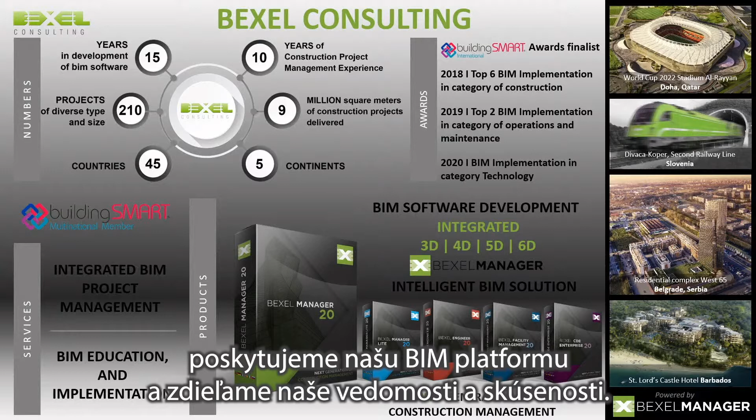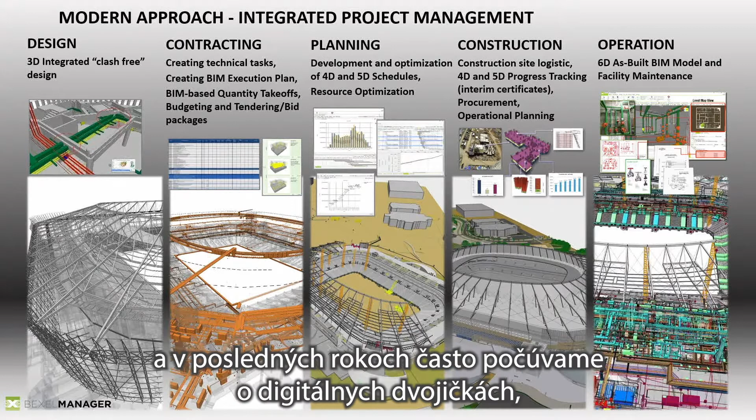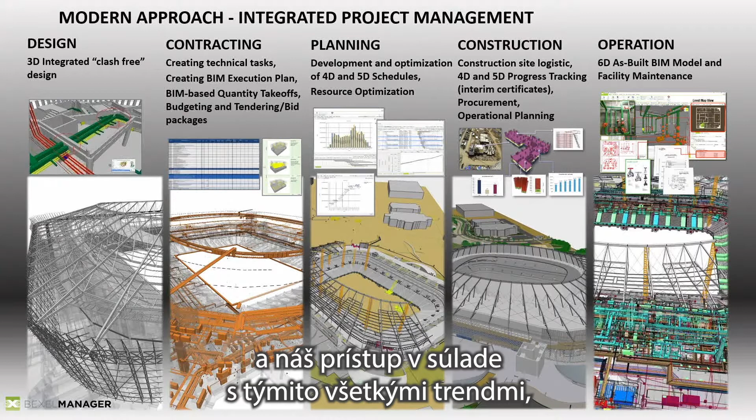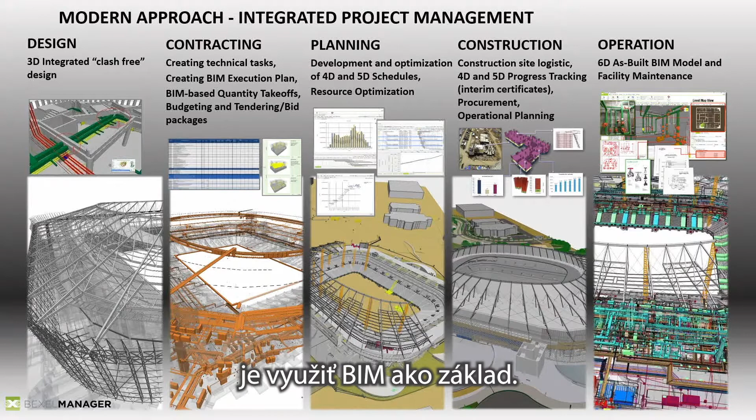We strongly believe that digitalization and integrated approach in construction is an ongoing process. In recent years, you often hear about digital twins, single source of truth, Internet of Things, and similar. Our approach is in line with all these trends, and BIM processes and standardization of construction are the foundation for success. The best way to optimize your construction processes is to use BIM as a base. Once you establish all these team members and processes, you'll be able to benefit in each step of that journey.

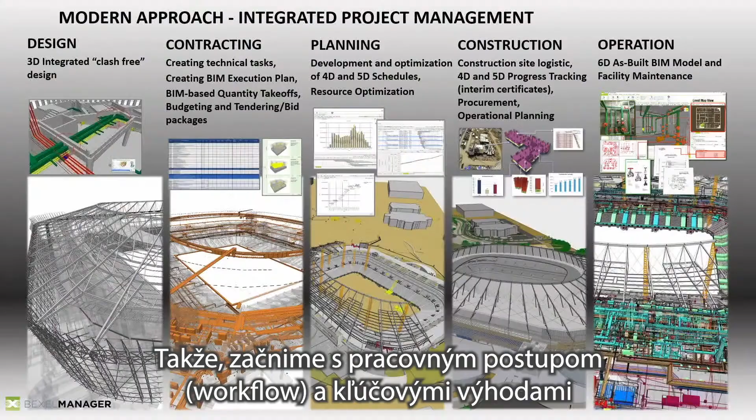So let's start with the workflow and key benefits of an integrated BIM approach using BEXEL Manager. One of the crucial things is the possibility to flawlessly and frequently manage and exchange your information. BIM is building information modeling, as you know, and that's why the use of a proper common data environment is very important. You need to be sure that all the data, geometry, information, and all the documents that you attach to the project are safe and that you can easily find the latest information.

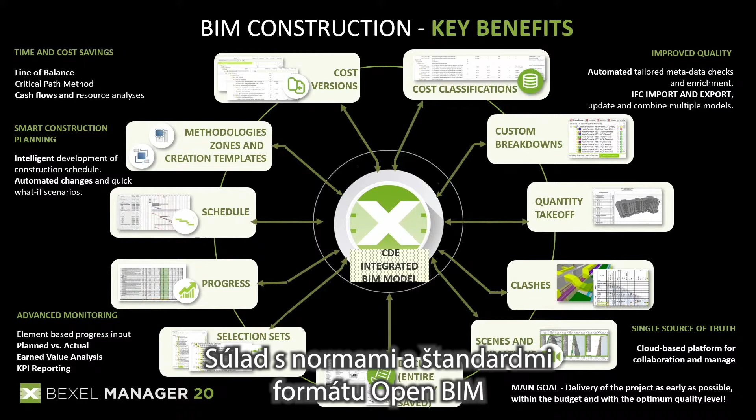You also have to have the ability to explore the entire history and all previous versions as well. Using BEXEL Manager, the common data environment allows all these things. What is also very important is compliance to open BIM standards and formats, so all the data can be imported using IFC files, which are the industry standard for information exchange.

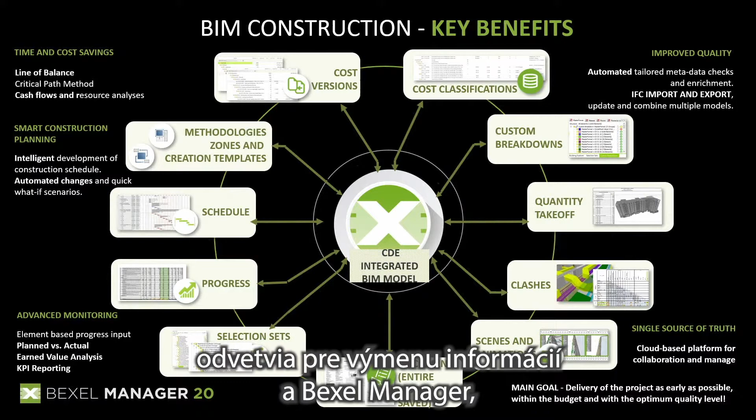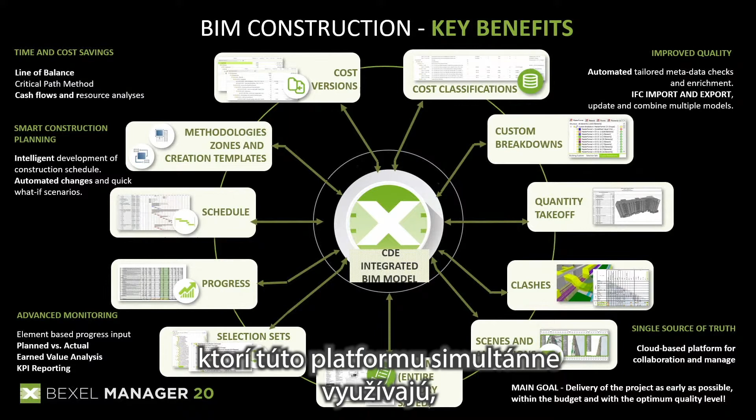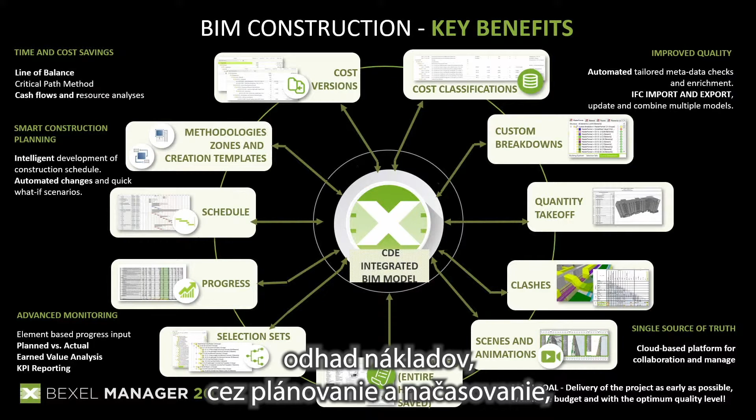BEXEL Manager as an integrated BIM management platform allows you to collect, manage, and inspect all BIM data in your project. And not just that - within the company and within the platform, we have a lot of specialists and experts who simultaneously use the platform for various analyses, from quantification, collaboration, cost estimation, through planning and scheduling, all up to tracking the progress and facility management once the project is completed.

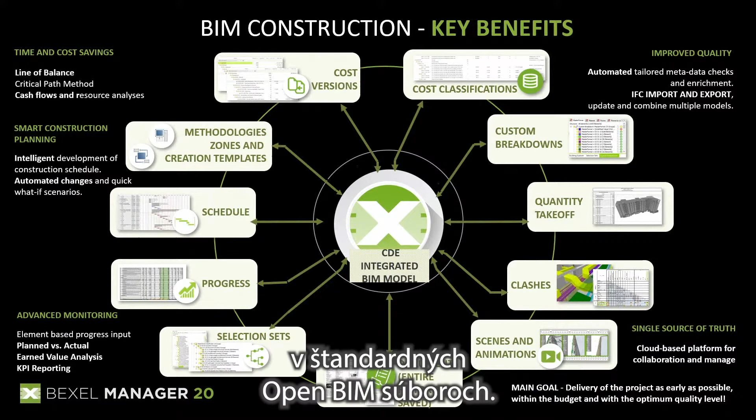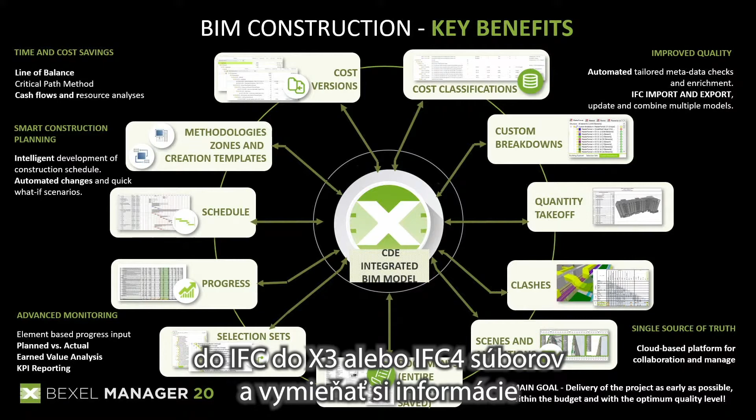So the data can also be loaded in one place and then can be easily exported into open BIM standard files again. Or to be more specific, you can export all your federated BIM projects into IFC 2x3 or IFC 4 files and exchange data using BCF files or Excel spreadsheets as well.

Nothing is more important than to present you how the platform works itself. You're gonna learn it best that way.

So this is a brief explanation of the workflow, and I will try to explain this on various BIM projects in which our company was involved, where we used BEXEL Manager to manage construction processes and use it in different levels and different stages of the project.

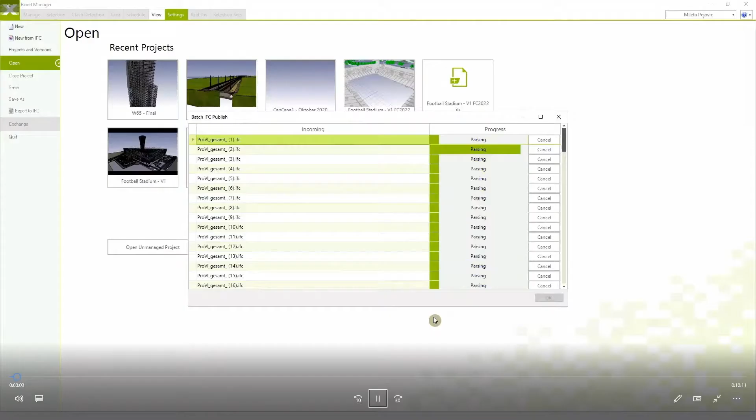As usual, everything starts with a good BIM execution plan and execution strategy. Once you have initial models, you can load various IFC files coming from different sources and authoring tools. The first step is visual data inspection of the project.

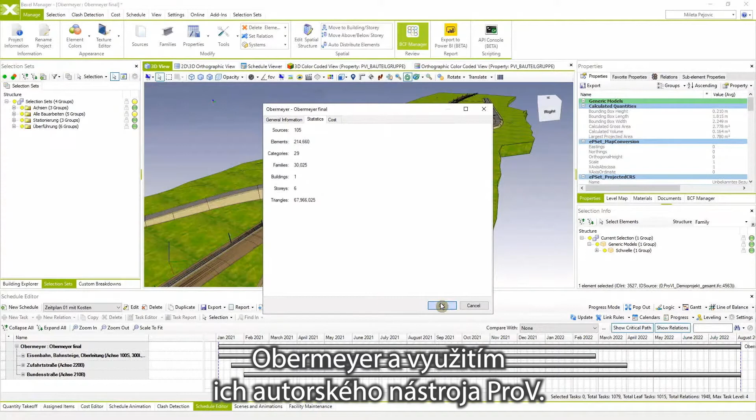In this case, the project you see is a railway project made by German company Obermeyer, using their authoring tool called ProV. The project contains hundreds of IFC files, and the next step is a BIM check, or controlling if all geometry and metadata were done according to specific requirements on the project.

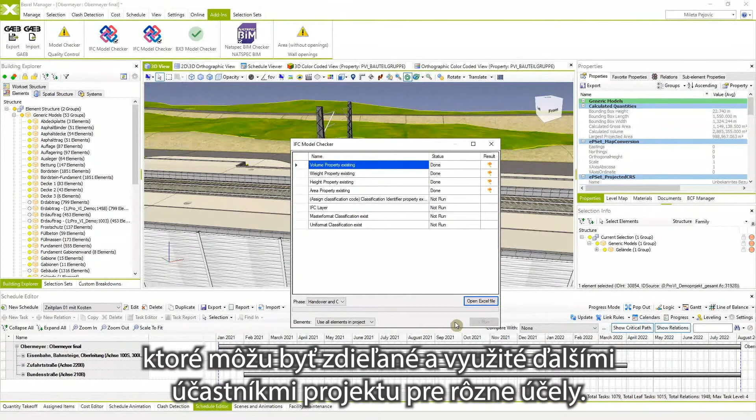That's why we used BIM checkers, or different add-ins which can be usually shared and used by different participants on the project for different causes. This is a really important thing, and that's why we perform different kinds of BIM checks for each different project according to the client's needs.

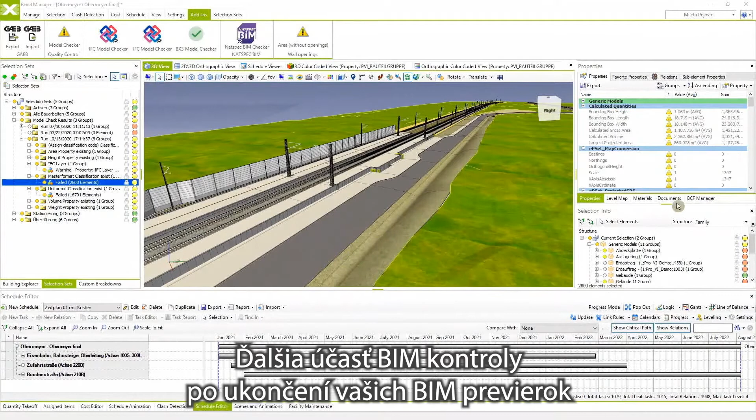Another part of the BIM check, after the completion of your BIM checks, is the ability to export and collaborate on all this data as BCF files. And of course, the next thing is clash detection, or collaboration on the projects.

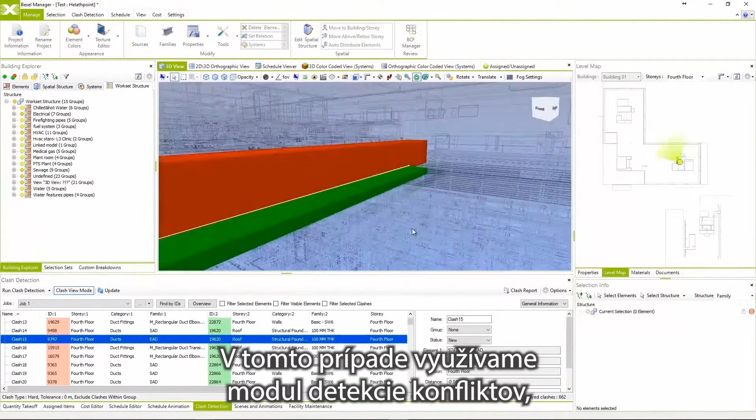We use a clash detection module in this case for a hospital project in the Middle East, and you can use different kinds of clash detection modules, different kinds of clashing jobs, and all these found issues can be easily exchanged with other participants of the project using BCF or BIM Collab, sharing these issues online via a supporting platform.

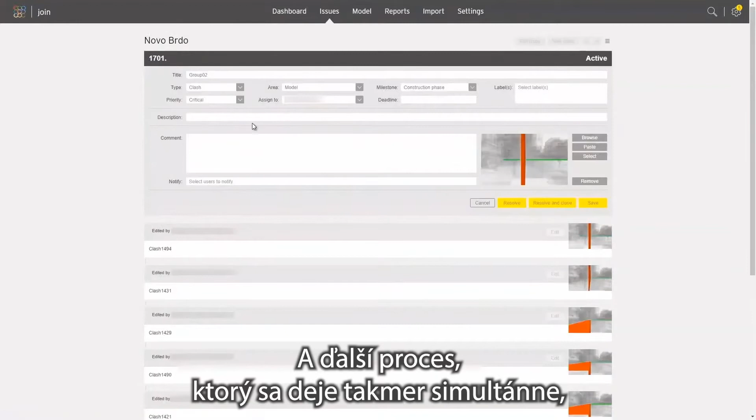And the next process, which is performed almost simultaneously with design collaboration and this clashing, is of course quantity takeoffs and quantification and generating of quantities.

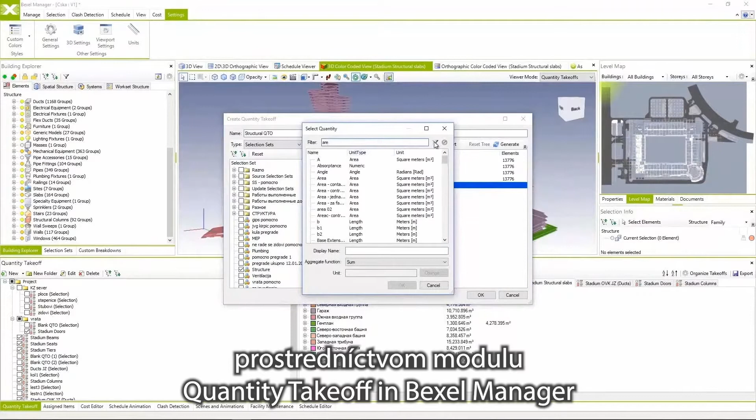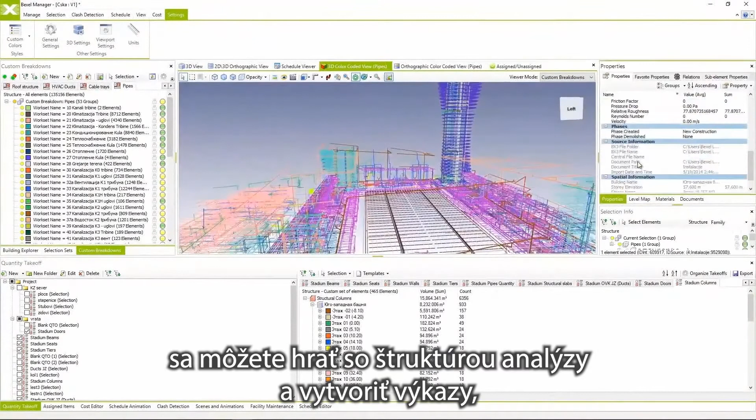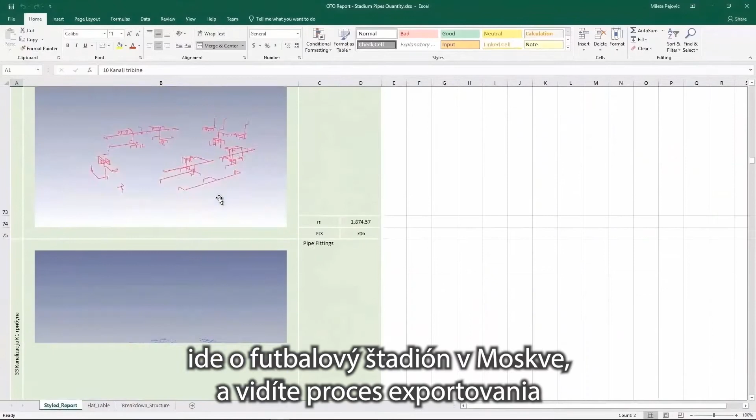So in this case, I'm showing you how this can easily be done using the quantity takeoff module in BEXEL Manager. Even in such a large project as this football stadium, you can see how quantity takeoffs are generated from scratch using various properties from the BIM model itself. Using these properties, you can play with the structure of breakdowns and create the quantities you want to extract, and all the data can be exported into customizable Excel reports. So here you see a quite large project, a football stadium in Moscow, and the process of exporting these quantifications into respective Excel spreadsheets.

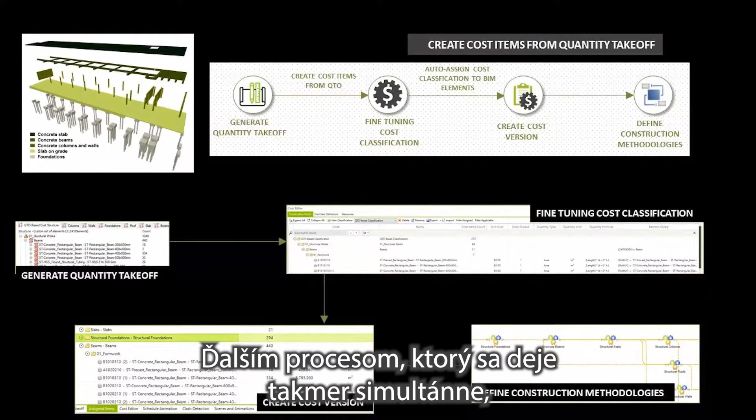The next process, which is almost simultaneously done, is cost estimation. And of course the next thing is cost classification and creating a cost database that can be manually adjusted and used for further steps in the project.

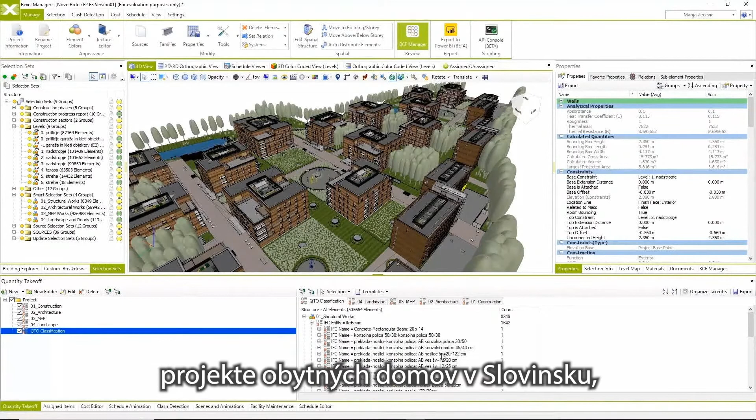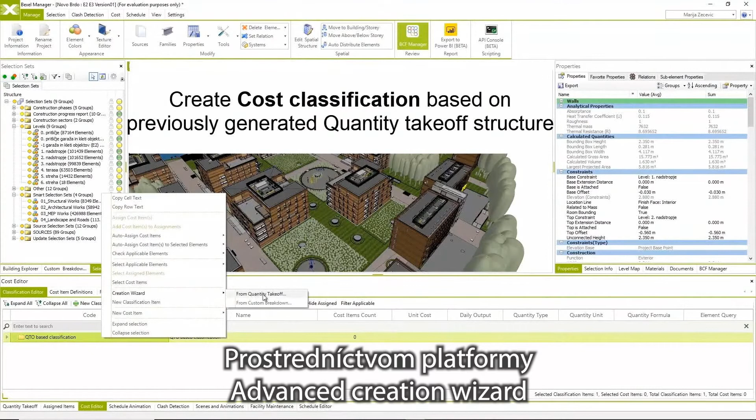So how this works on another large-scale project, in this case a housing project in Slovenia, I can show you the entire BIM-based cost classification created using the previously generated quantity takeoff structure. Using the advanced creation wizard, the platform generates an entire classification with a cost database and cost items, also with smart queries, which can be used to link your BIM model elements with your cost items.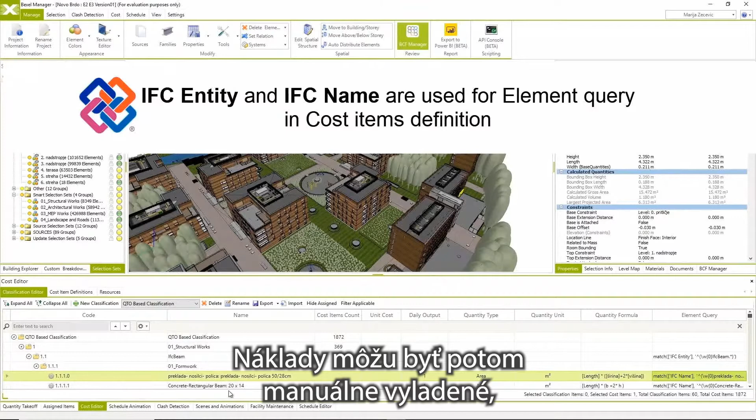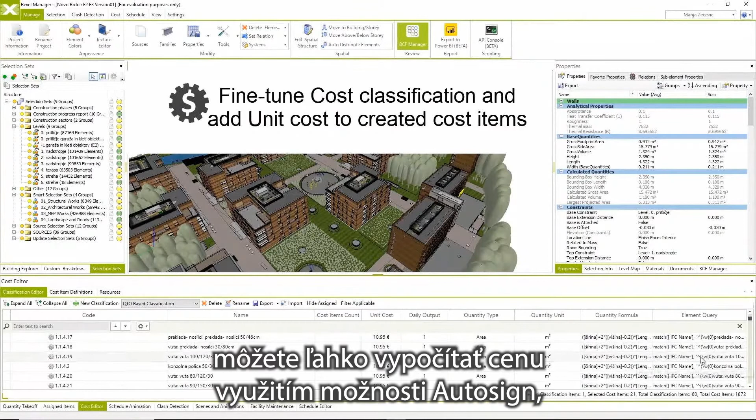Cost can then be fine-tuned manually, specifying custom formulas or calculations in order to have accurate unit prices and resources. Once you're satisfied with this cost database, you can easily calculate the price just by using the Auto-assign option, which connects all your BIM elements with cost items, and using the provided formulas, creates the specified price and value of your project.

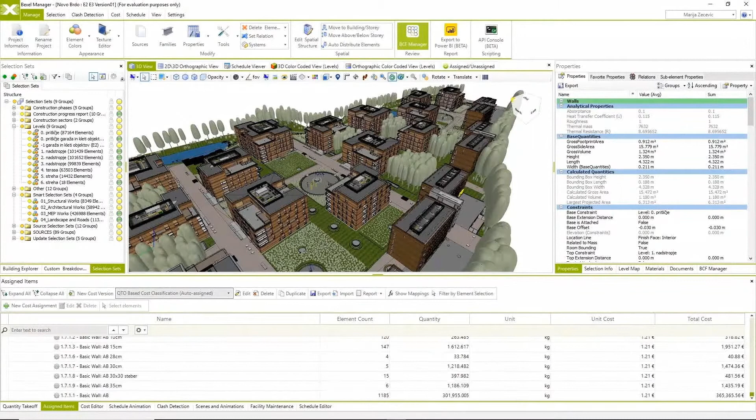This also can be adjusted. All these cost versions can additionally be inspected and managed, and also exported into Excel spreadsheets and compared with different cost versions.

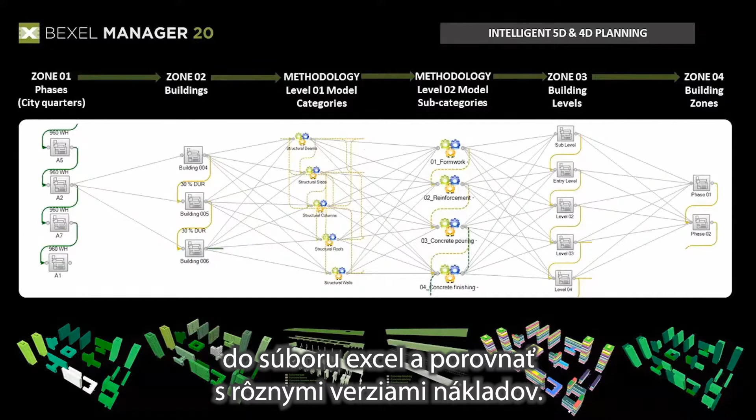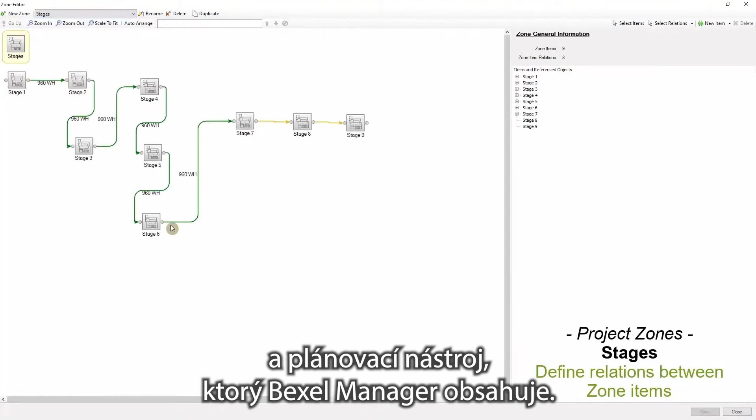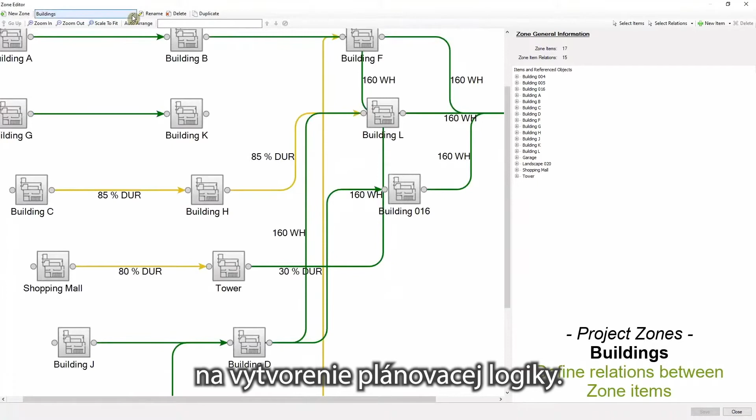The next really important thing is planning. This is how we actually perform planning and scheduling processes using the specific methodology and scheduling engine that BEXEL Manager contains. The engine allows planners to use planning logic and work efficiently using existing cost classification and zoning to create scheduling logic, so the system generates hundreds of thousands of schedules and relations.

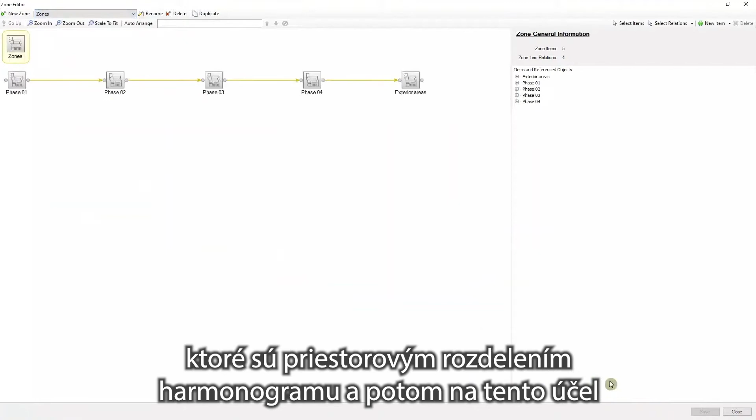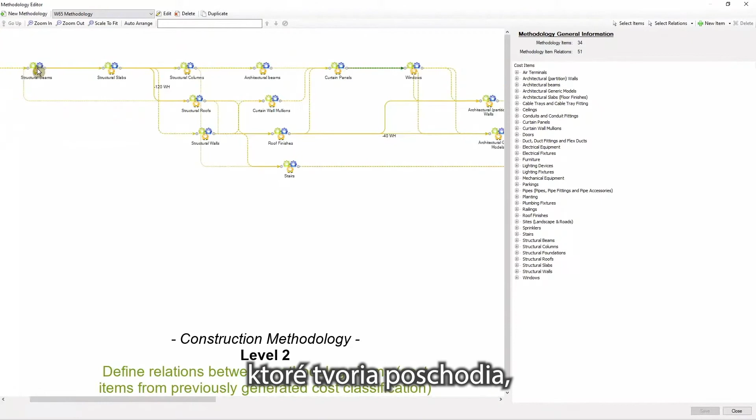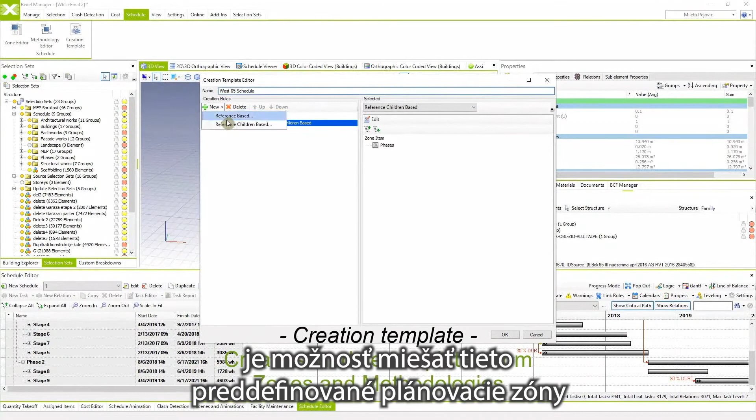First, the planner has to define zones, which are the spatial segregation of your schedule. For this, we can use selection sets and existing system-based segregation like building stories. But what's more important is methodologies. Here you can see methodologies which are used to create different levels, or multi-levels, of the tasks of the future schedule. One of the greatest advantages of BIM scheduling is the ability to mix these predefined zones and methodologies into various variations of your schedule structure or activity relations.

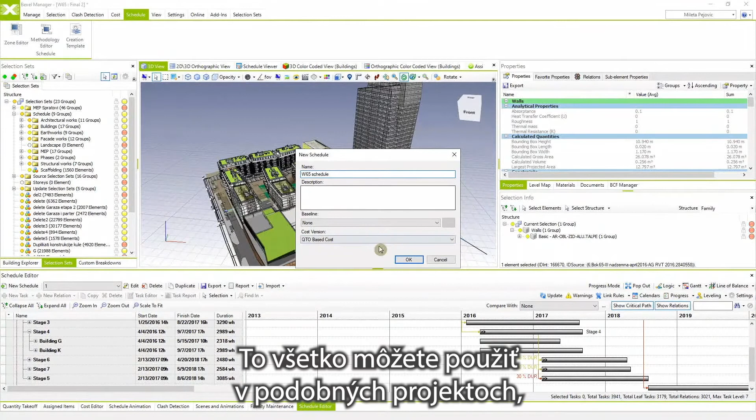These different options can be saved as schedule templates, so all of this can be used in similar projects. You can create one methodology and reuse it for multiple similar projects. Schedule templates allow you to almost instantly generate multiple schedules as a result, without wasting too much time on scheduling itself. So you can see how it works.

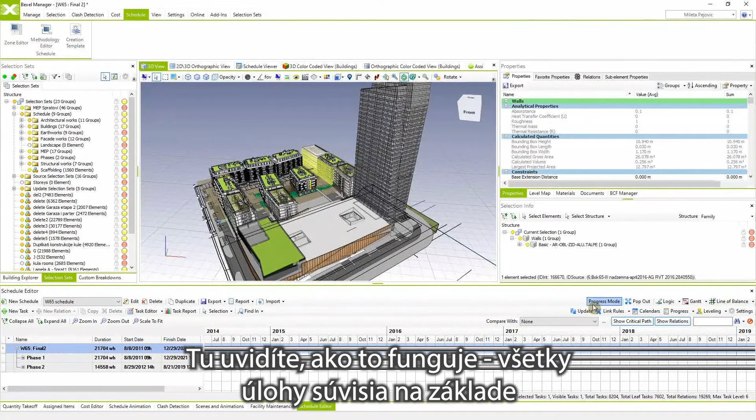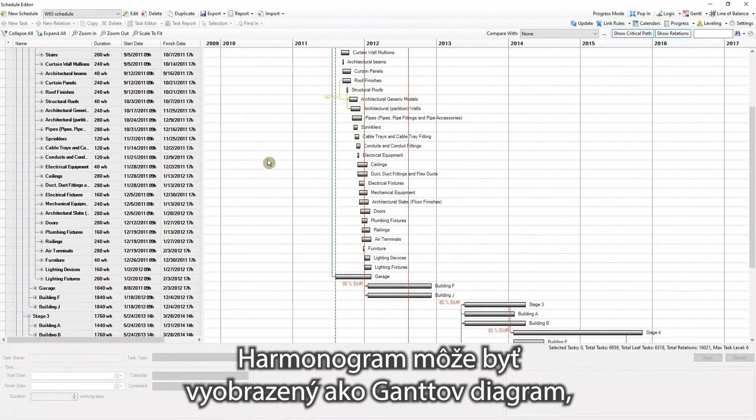All the tasks are related following predefined relations specified in the zones and methodology, and all the tasks are spread down through all schedule levels as specified by the template. The entire schedule can be viewed as a Gantt chart, but more importantly, you can see it in the form of a line of balance, which gives you even more information and insight into spatial segregation of your activities and resources.

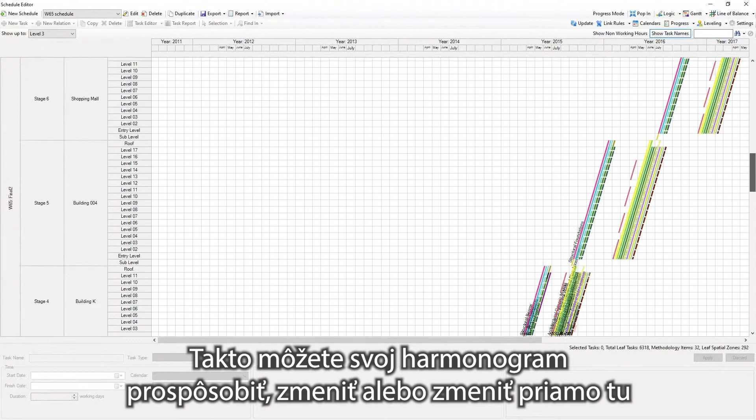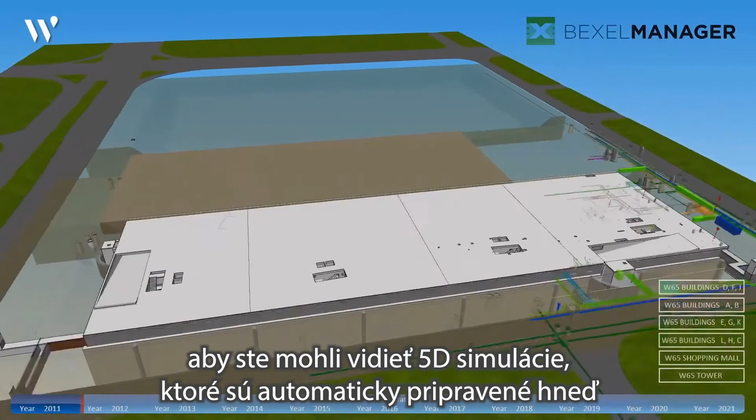So you can customize your schedule, changing it directly here in the line of balance, or, what is even better, your BIM model is automatically related, so you can see your 5D simulations, and they are ready instantly when you generate your schedule.

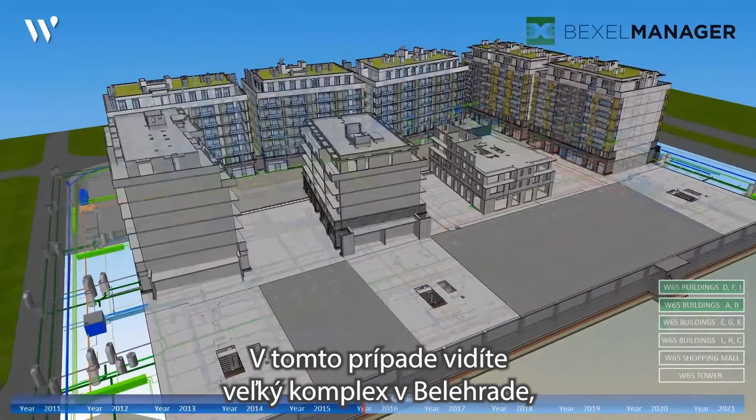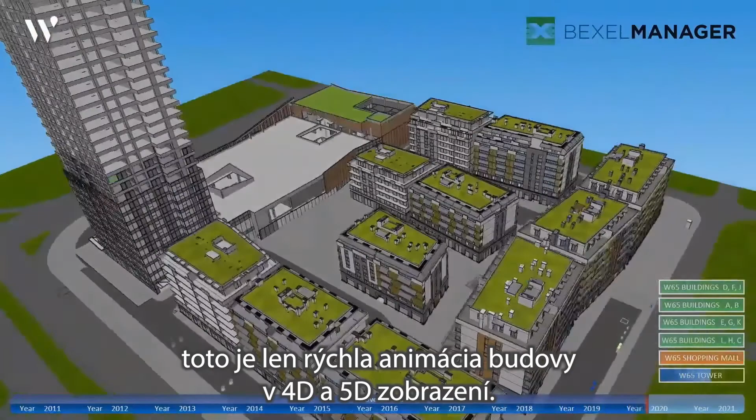So in this case, you see a large complex in Belgrade, which is also scheduled and managed using BEXEL Manager as a platform. This is just a brief animation of a 4D and 5D construction.

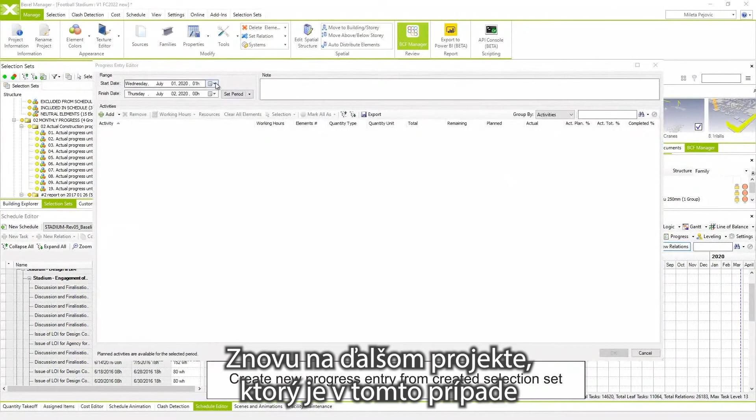So for the end, when the construction starts, you can use the platform to track your progress, and this is really important. So again, on another project, in this case another football stadium, I want to show you how easily you can use selection sets and groups of elements to create your progress entries.

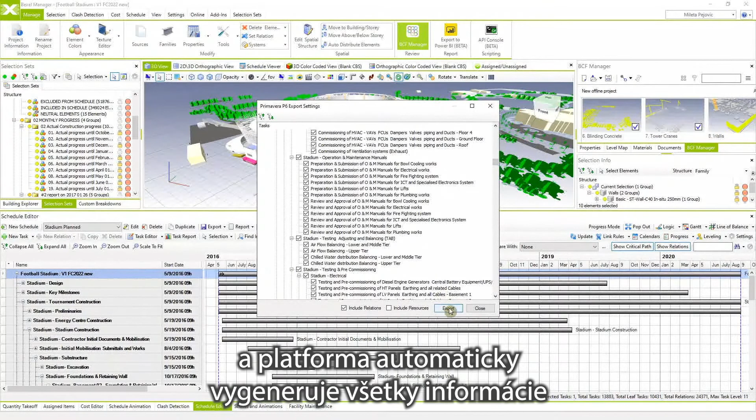These progress entries can be entered immediately, and the platform automatically generates all the information from the input data. You can export the created schedules, planned and actual, into Primavera or MS Project, and compare these schedules in other scheduling tools such as MS Project or Primavera, but you can also use BEXEL Manager itself for these purposes.

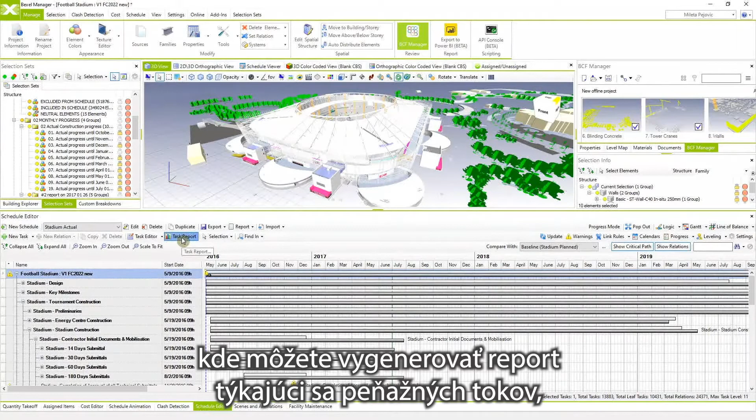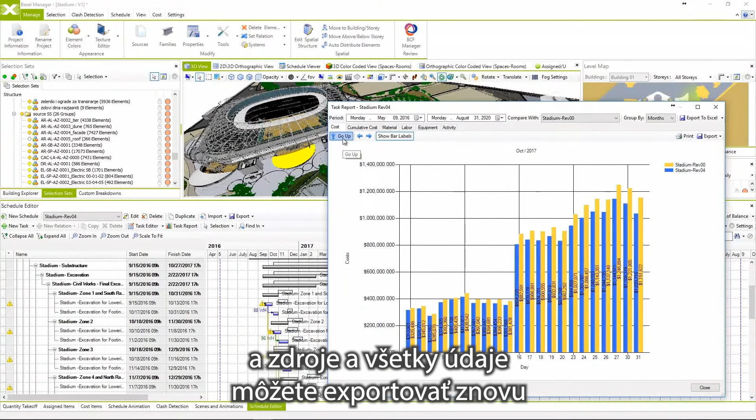And what's even more important, once you input the progress data, you can perform baseline schedule and actual schedule comparisons using the advanced reporting system, where you can generate cash flow reports, perform earned value analysis, track your activities and resources, and export all the data into Excel spreadsheets, Power BI analytics, and of course video animations of planned and actual construction schedules.